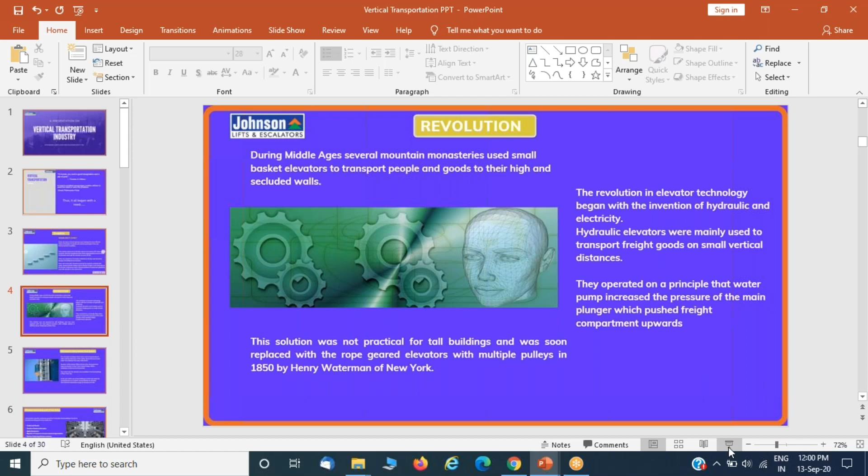So let me start from the evolution: when did it start, how did it start? As I've mentioned in my presentation, during the Roman Empire at the Colosseum Arena in the 1st century AD, the arena hosted around 24 elevator cages. Back then, they were operated by human force: some 224 men in teams of 8 worked on a single winch to lift gladiators, people, and animals up into the Colosseum. That's when it basically started. People started thinking about lifting objects, animals, and then finally humans.

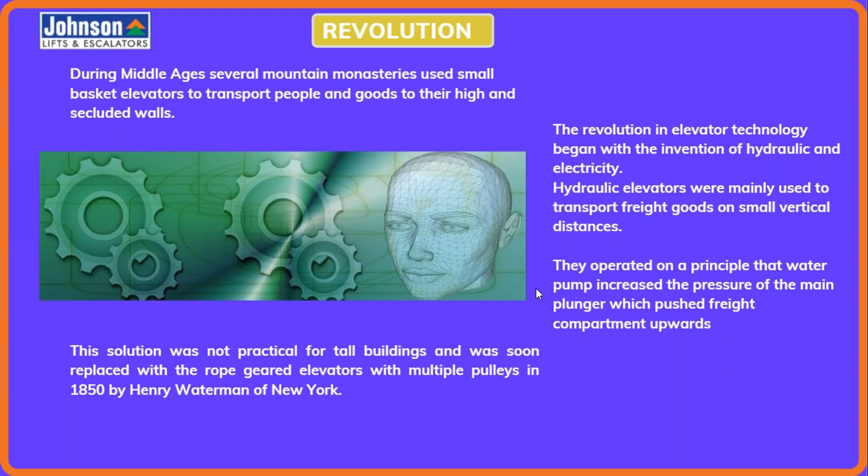Then during the Middle Ages, monasteries used small basket elevators to transport people and goods to high altitudes. With the passing time, the evolution was supported by a revolution in hydraulic elevators, in which plunger pumps were used as a crank mechanism to create a reciprocating motion. Then in 1850, because that solution was not practical for taller buildings, rope geared elevators with multiple pulleys were introduced by Henry Waterman.

Elevators in the present form factor, which we have today, were basically invented by Mr. Elisha Graves Otis, who was keen about the safety of an elevator. He himself did that famous testing demo back in 1854 at an exhibition.

So yeah, basically he called it an automatic brake elevator. He demonstrated it by way of a man with an axe cutting the rope that held the elevator, and it stayed intact without falling down. That's when the security mechanisms were being thought upon.

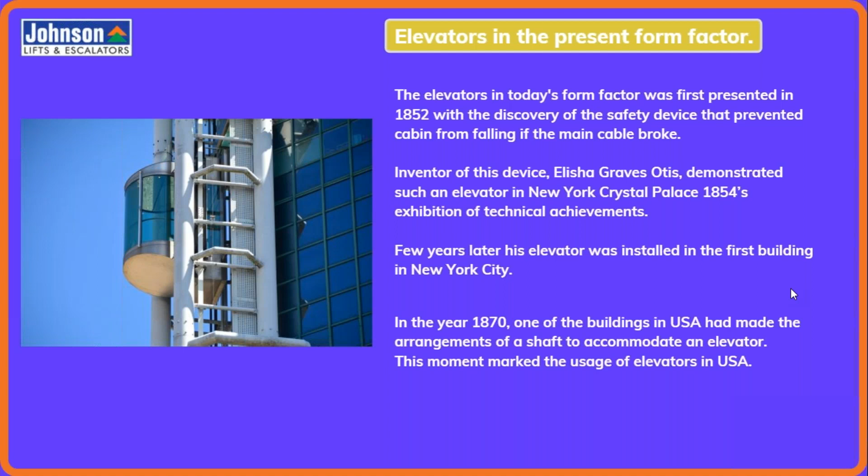And then later, after that invention by Elisha Otis, in the year 1870, I think, a 5-story department store in New York City was the first one to install a proper elevator with security access intact. Then in the year 1880, I believe, a German inventor, namely Werner von Siemens, built the first electric elevator. So the electric elevator came in the year 1880.

Now, let me take you to the need of elevators in today's time, or elevators being part of our lives. As you can clearly understand, following are the reasons for which elevators have become part of our lives. Because of the vertical rise in urban areas and even tier 2 and tier 3 cities, the costly land parcels have led to this. Scarcity of land at prime spots, rapid urbanization.

So when I talk about costly land parcels, I would love to give an example here. Today, the costliest land parcels around the world, if I can give you some examples, are in Monaco, which is around $49,000 per square meter. Second comes New York, which is around $34,000 a square meter. It is followed by London, Tropez, Sydney.

Now, if I talk about India and coming to our own home place, that is Bangalore. Here, as you know, some of the costliest places are Sadashiv Nagar, which is around 20-25,000 per square feet, Shanthala Nagar, that's the Lavelle Road, which is around 20,000 per square feet, followed by Richmond, Indira Nagar, and Koramangala. So these are the reasons why the vertical rise has taken place, and similarly rapid urbanization, as I spoke about.

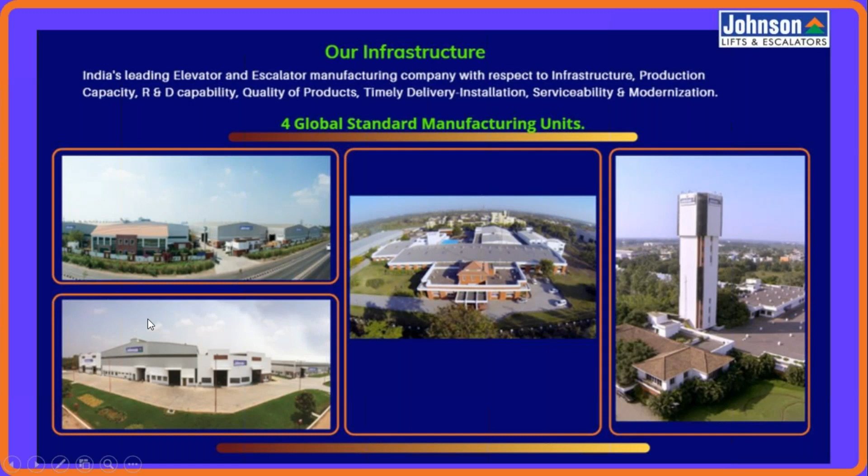I'll briefly take you through our factories based out in Chennai. The one on the extreme right is a 155-feet tower, which is used to test the elevators. The other 3 you see are elevators and escalator manufacturing factories. I'm being told not to give detailed explanation about my brand, and to be specific about the vertical transportation industry. So coming back from my company introduction to the type of elevators.

Elevators are basically classified into passenger lifts that we use regularly, and hospital lifts, which you have seen in hospitals. Hospital lifts usually are wide and come with stretchers. Car lifts, as the name suggests, you might have seen in malls wherein the multi-level parking has to accommodate the cars. Then goods lifts, freight lifts, and home lifts, usually in your duplex or triplex homes wherein an elevator is being used. Scenic lifts are capsule or more aesthetically friendly lifts.

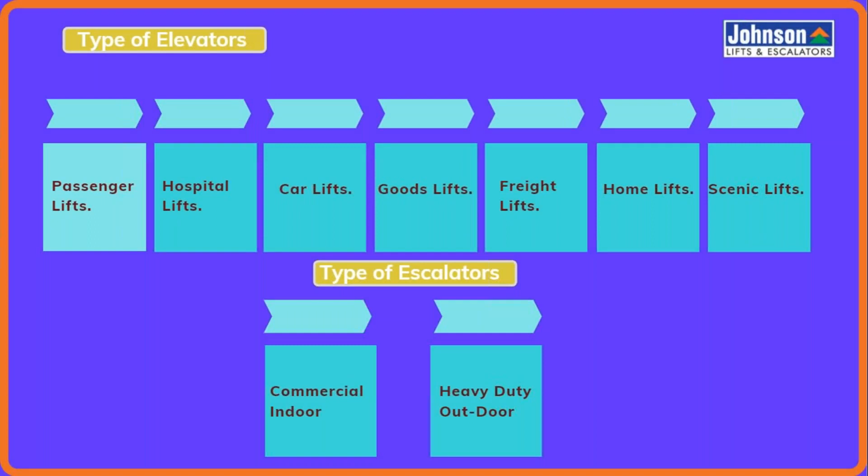Similarly, escalators are of 2 types: commercial indoor, that we see inside a mall or a commercial establishment. Then heavy duty outdoor, which are rugged, for example in your railway stations and metro stations, which are exposed to sunlight and rain. So they withstand that heavy exposure.

Now coming back to mechanisms of lifts. Lifts are classified into 2 mechanisms: traction lifts and hydraulic lifts. In a traction lift, a motor is attached to a sheave. You can look at the diagram: a motor is attached to a sheave with a rope or a cable looped over it. The rope is attached to one end of the lift car and the other end to the counterweight. This is the mechanism used in traction lifts. Basically, it is a counterweight that balances it.

So coming to hydraulic lifts, a hydraulic elevator is basically driven by a piston, and the piston movement can be done by pumping hydraulic oil to the cylinder. Here in the diagram, you can have a look at an image of the hydraulic elevator wherein the piston, the shaft doors, and the buffers in the pit are visible.

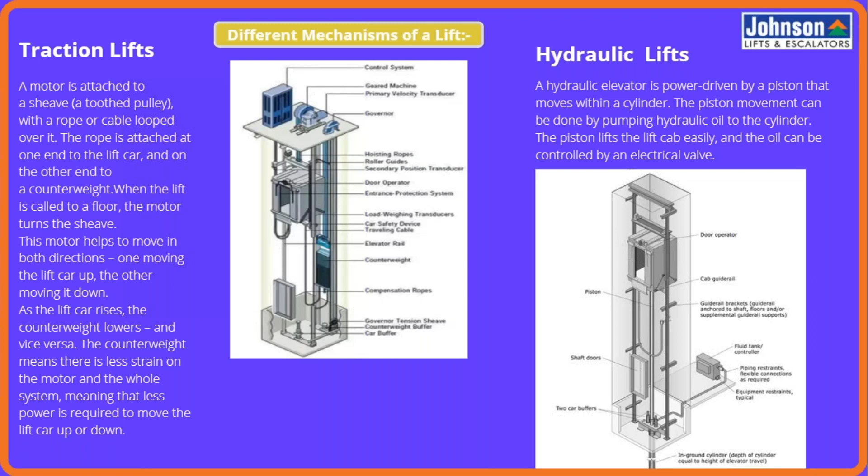Now, after taking you through traction lifts and hydraulic lifts, basically traction lifts are being used in present days, and hydraulic lifts are rarely used because hydraulic lifts do not serve you for more than 15 meters of building, because it is run on a piston and is not entirely safe. And also hydraulic lifts require a lot of maintenance.

Now coming back to important parts of an elevator which I want to specifically highlight. One is the motor. Motor basically comes as a geared motor and gearless motor. Then the most important part of an elevator is the controller, which we can relate to our brain, which is the one that decides the actions and the feedbacks in an elevator. Then again, the car, which accommodates people, passengers and goods, and the aesthetic features of the car. So these three are the most important parts in an elevator.

Earlier it was induction motors that were being used, and induction motors are mostly used in geared machines. So here the speed limit is higher, they have higher installation and maintenance costs, and they are not environment friendly. I'm talking about the geared motors.

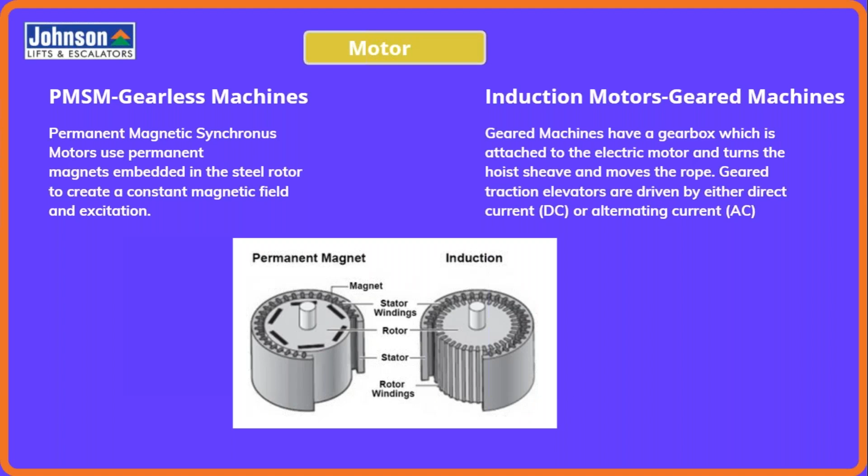Now, after machine roomless and machine room accommodation, now coming to control systems. As I said, and to repeat, a controller is like the brain of an elevator, which controls the movement of the elevator. So it basically supports safe drives, acceleration, deceleration, halts, inverter control to stop the elevator in position. And in case of multiple elevators, the drive functions can be elevated by a group control system.

The other important mechanisms in an elevator after controller are automatic rescue device, overspeed governors, and V3F drives. So coming to automatic rescue device, as I've mentioned, it is a device placed within an elevator that comes into action during the event of a power failure. In earlier times, ARDs were not available and it was difficult to rescue a person. Now with ARDs, this device makes the lift travel to the next floor by way of a limited power supply required for the movement of the elevator.

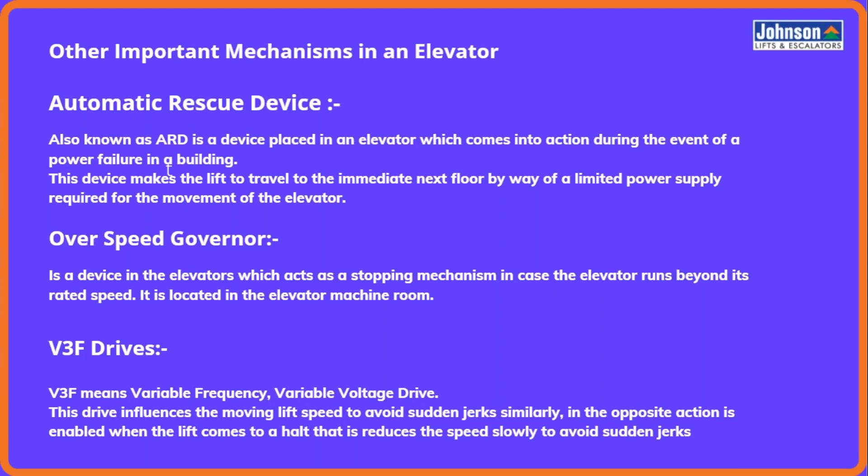Hello, am I audible? Yes, you are. Okay. So there is continuity network, right? Any response here? Hello. Okay, continue. It's clear. No issue. Continue. Okay, thank you.

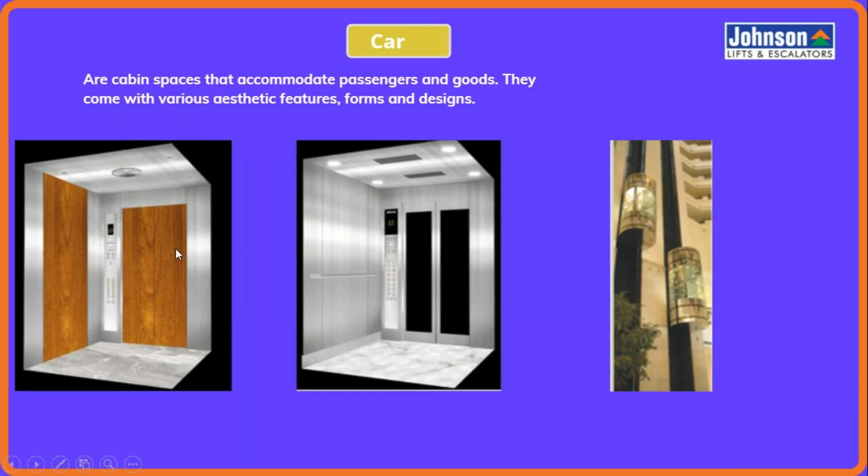And then this, the third one on the extreme right, is a capsule lift. Then the first one here, as you can see. Okay.

Now coming to modernization, it's been specifically asked to talk about modernization during this meeting. Modernization, as you all know, is the process of upgrading an elevator by changing the critical components with new technology. The obvious reason being better performance, enhanced safety, reliability, energy saving, and aesthetics, importantly.

And why do we need modernization? Because it provides operational efficiency, reduces equipment downtime as against the previously installed elevators, extended lives compared to the older generation of elevators, and these equipments ensure compliance with the presently applicable codes. Similarly, comfort levels are high in today's elevators. The aesthetics are better, and safety is the most important feature in the present elevators as against the older ones.

Now, what should we modernize? Basically, the modernization can be of the controller or the motor itself, the door operations. The older ones used to be iron bar doors. Then car cabins, that is within the car, the aesthetics can be modernized.

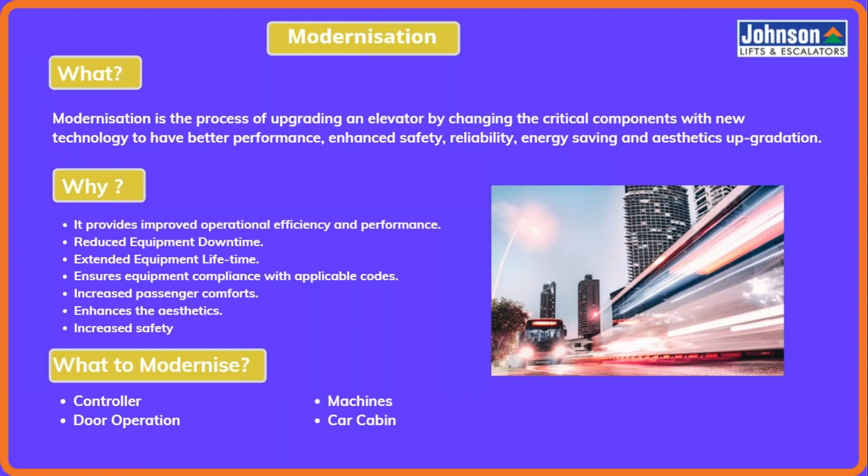Now, how would this be done? How does a modernization at your site happen? Basically, a team from the OEM manufacturer company will arrive and make a survey and a feasibility check. They'll submit a proposal based on whether it is suitable for modernization or not. Then there'll be some general arrangement drawings that will be made.

The arrangement drawings are sent to the production department of an OEM manufacturer, and after the arrangement drawings are approved, the production clearance happens. Once the production clearance is done and it gets into production mode, the site is also prepared to support the installation.

Finally, after the installation is done over a period of 40 to 45 days from ordering, erection, testing and handing over is done. Testing consists of acceleration and deceleration testing and other factors within the elevator, and then it is handed over to the person looking for modernization.

Now, coming back to the Make in India concept, I wanted to briefly talk about Johnson's Make in India presence. Johnson Lifts today contributes to Make in India and also to the vocal for local concept raised by the PM of India. We were selected to...

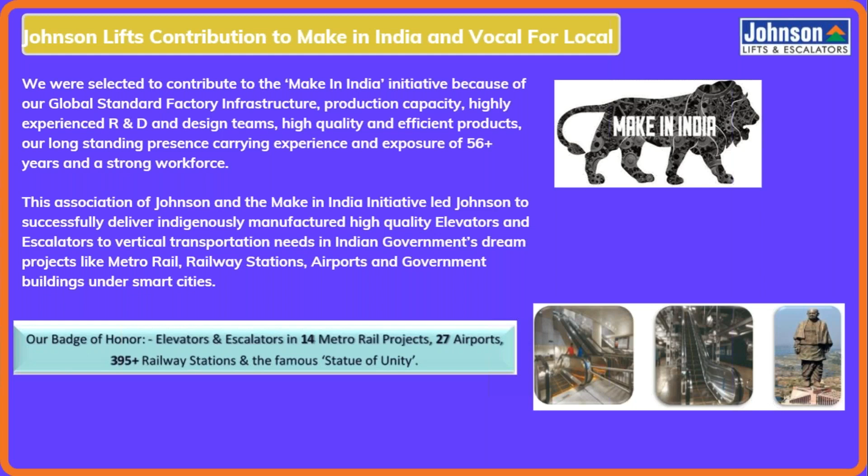Now I would also like to talk about the do's and don'ts of an elevator that you have already installed in your respective buildings and apartments. I'm being asked specifically to talk about the do's and don'ts of having an elevator.

One is, during a breakdown, kindly go and check the power supply. Check if all three phases of power supply are available. These are the do's. Check the incoming main fuses. Check whether all the landing gates and lift gates are closed properly. Please check whether all three phases are in sequence.

Similarly, do not load the lift beyond the rated load. Do not allow water into the well and machine rooms. Do not touch the lift parts without switching off the power supply. Do not tamper with any of the controller circuits, which is the most important part in a machine room accommodation.

Now, the precautions that have to be followed when having an elevator, the safety measures for relieving passengers trapped inside the lift.

The following steps should be observed. The lift has stopped in between floors. Normally the large portion would be visible from one of the landings, so that landing for carrying out the rescue operation should be selected. The door opening key should be used in the provision provided above the push box. Push the door open with the key and open the door lock. Help the passenger to come out of the lift, ensuring they do not slip into the lift shaft. If any stool is provided for stepping on, please hold it firmly to prevent it from slipping.

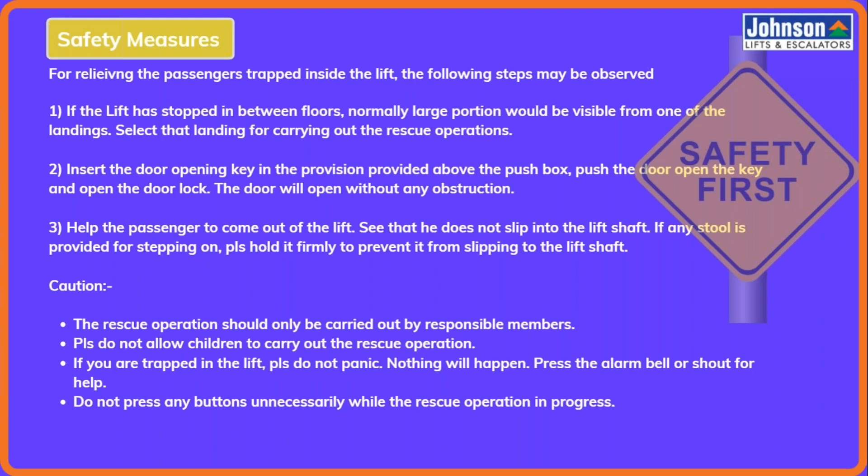Now again, talking about the Iris, Johnson Iris, which was introduced during this pandemic. It is a touchless call booking facility, wherein Johnson provides an app, and a barcode is pasted on the elevator. With an iOS and Android supported app on your mobile phone, you can book the call without touching the buttons of an elevator. This is one of the introductions we have brought by Johnson during this pandemic.

After introducing this, we have also introduced foot touch call actions, wherein we can go for call booking through a touch of the foot.

Now, moving on to the next slide.

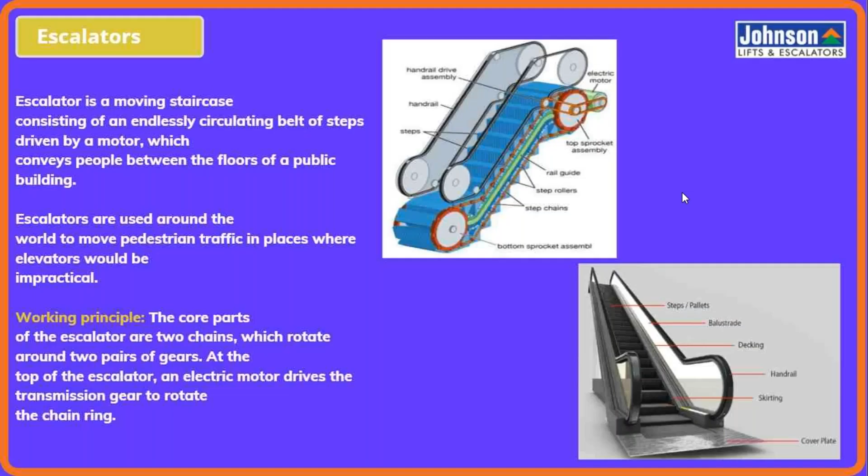In elevator maintenance, the important factors are what needs to be maintained basically in an elevator: the machine room, the elevator shaft, the car top, elevator pit, the controllers, the ARD, and the speed governor. These are being followed by the OEM service providers.

If I talk about the machine room, in a geared machine room, the maintenance is usually for oil levels, whether to replace the oil, bearings of the shafts and motor bearings, and also greasing the wheels. For gearless machines, maintenance would consist of greasing the bearings, and after some years maybe the bearings have to be changed.

If I talk about the controller, it usually depends on the number of operations. For example, after 10,000 operations it has to be maintained again - the contactor has to be replaced. There is something called a contactor which has to be replaced, and there are relays in the controller that have to be replaced. There are power drives, that is capacitor banks within the power drives, that have to be checked.

Now we also have to maintain the ropes, cleaning excessive oil which is being formed on the wire ropes. It has to be cleaned so that there are no jerks. And then there is something called a speed governor, which should be tested whether it is acting properly or not. Then we have to examine the earthing, which has to be checked periodically.

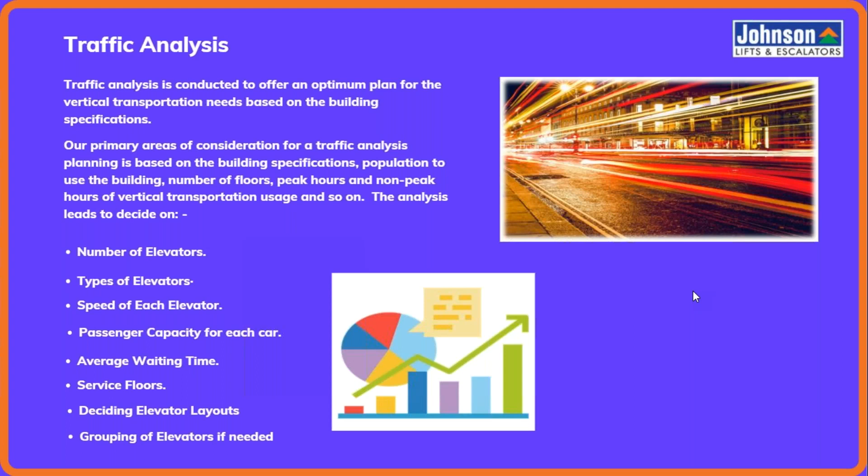I think I'm done with this presentation. I'd like to keep it open for inquiries here or any concerns that are being raised.

Parts which should be required every year or very frequently. Hello sir, come again sir. Is it audible? Yes, audible. I want to know the consumable parts which should be used very frequently, like in a year. Yes, what are the consumables required? Yes, Abhishek, I will answer this question.

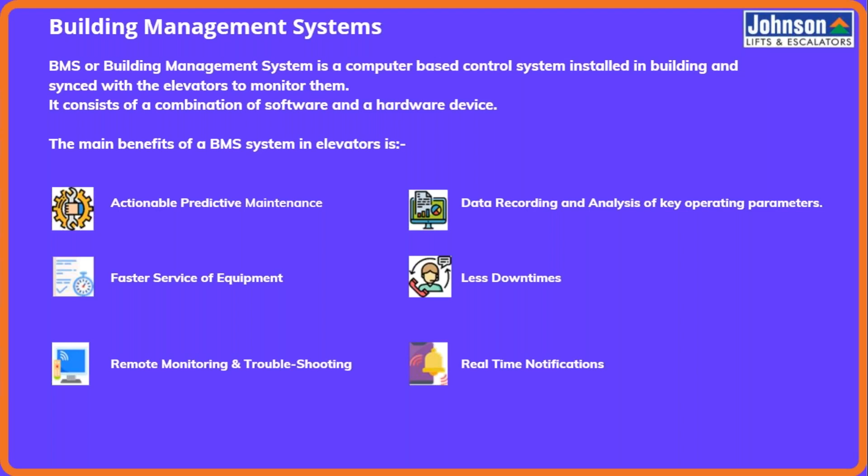So the consumables in the lift, point number one, every year: suppose it is a geared lift, we have to replace the gear oil, that is the main thing. Then we have to lubricate the motor bearings, and we have to change shoe liners. Shoe liners are what the car travels on along the guide rail. We provide Teflon, nylon, or acrylic liners. This will wear and tear every year, so it has to be maintained and replaced every year. These are the consumable items.

Other things are your buttons, limit switches, terminal switches, door switches, door opening limit switch, closing limit switch, that has to be replaced. Third one is the batteries, your alarm batteries, ARD batteries. Normally ARD batteries last 1.5 to 3 years but have to be maintained. Nowadays everything runs on battery; in olden days we had to fill distilled water and maintain other things. These are the things we have to replace.

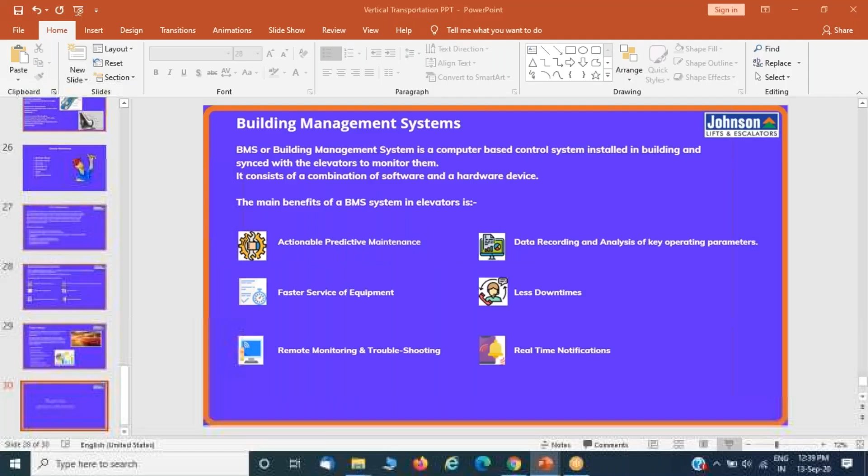Coming to the mechanical side, the rope has to be monitored. Normally our wire ropes, if maintained and lubricated properly, will last a minimum of 10 to 15 years based on usage. In the apartment sector, with 4-5 landings, it will last 15 years; in high-rise buildings, 7 years; in commercial buildings, 3-4 years. Thereafter it requires maintenance, lubrication, or replacement. It has to be maintained and cross-checked after 3 years.

Thereafter, coming to the sensor side, those sensors have to be checked because they are continuously used - the quality of sensors and cables connected has to be checked and replaced within 3 years. After 5 years, we have to check important components like the logic circuit boards, the push buttons, landing LOP or push buttons, and displays. Normally after 5 years, displays - whether LCD, LED, or dot matrix - become dull or start malfunctioning, for instance showing 9 instead of 7. That has to be inspected and replaced.

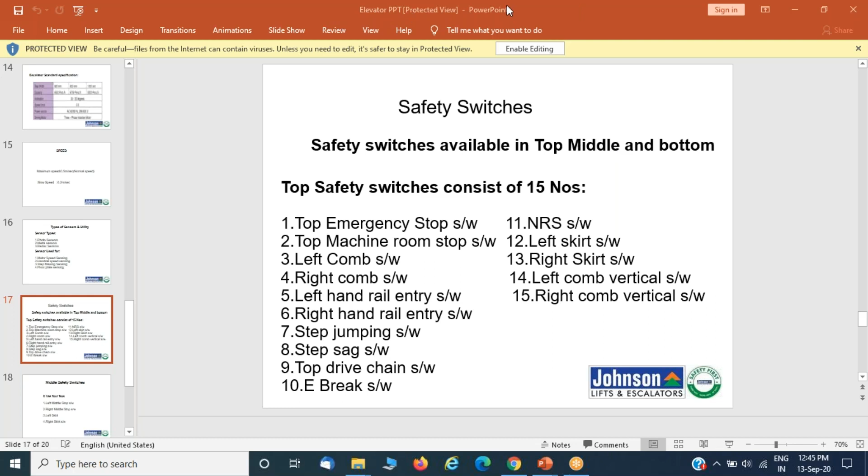In the circuit boards themselves, they will have various protections. Instead of burning out or damaging the circuit board, they will have fuses, photoelectric diodes, and many transistors involved in the circuit board. But one thing, whatever we are giving is the minimum protection.

In case of lightning, or in case your HT line short circuits, for example any HT line cord cuts and shorts, a momentary higher voltage feeds into the controller. At that time there may be a 50% chance of circuit failure. It will happen once in a blue moon, very randomly. But minimum protection is already given.

So you need to understand one thing, that electronic circuit boards have their own lifetime. Obviously, in the first 3 years there won't be any failure or malfunction. In the 3rd, 4th, and 5th year, there may be a little concern, around 50%. After that, it requires replacement. After 5 years, replacement of the circuit board will be required.